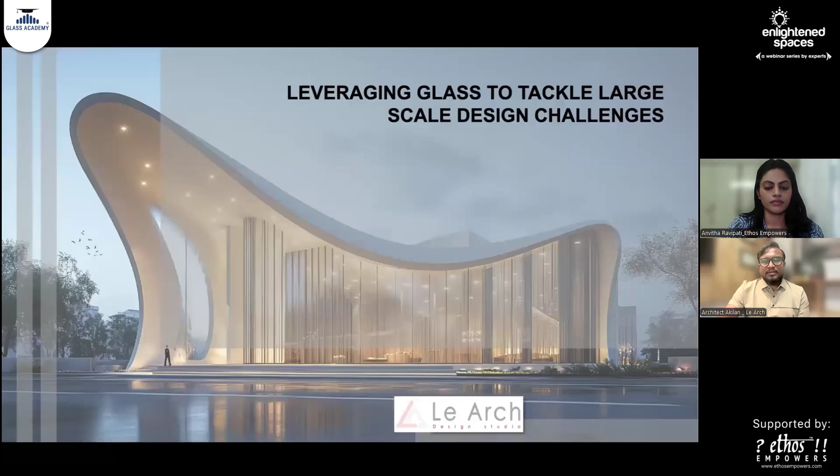I want to show some slides about glass. If you see this image, you can see how, because of this glass, we are connected with nature. Without glass, just imagine how this would look. If there were a solid wall behind this, there would be no connectivity between external space and internal space. So basically, glass's main unique ability is to dissolve boundaries between inside and outside.

Through glass we can connect with nature too. If you see this slide, you can see how architecture and nature are connected. Behind the glass is a totally contrasting world from the real world, and behind that we are living in it. So between architecture and nature, the connectivity is there.

Also, if you see this, it's a built form and human emotion. We can view different typologies of built form through our living spaces. It also frames views and creates a sense of openness. If you thoughtfully design the glass, it's not just making the building transparent, it makes it alive. It changes through the day with light and reflections, so it's constantly connected with the surroundings. That's the idea of glass.

It also invites light. So through these slides, what I'm trying to convey is that glass can be used in all surfaces - no matter if it's a wall, a floor, or a ceiling. Everywhere we can use glass to get connected with the outside world. That's why I want to mean it as a connector.

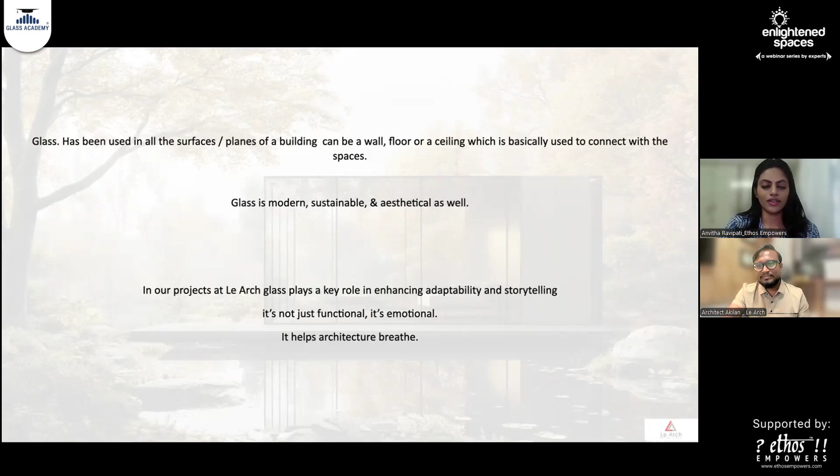Absolutely, very well put. I think now that we have these pictures in front of us, we'll be able to relate to it on a much better level. Now that we saw a glimpse of the visual understanding of the importance of glass, put beautifully through an amalgamation of pictures that you shared in your presentation.

This leads to the next question: you've worked on a wide range of projects from hotels and wedding halls to experience centers and commercial buildings. Could you walk us through a few of these projects where glass played a pivotal role in shaping the design, both in terms of aesthetic and performance? Now that you've shared your initial presentation, we're interested to see a little more about your projects. Feel free to have a dialogue and share your screen.

Definitely. So I just want to explain the typologies of glass. If you think about glass, it can be used in architecture for different mediums - for strength purpose, for safety purpose, for thermal insulation purpose. So the purpose of the glass defines the building. I want to present the typology of glasses and how it helps in doing the design in our large scale projects.

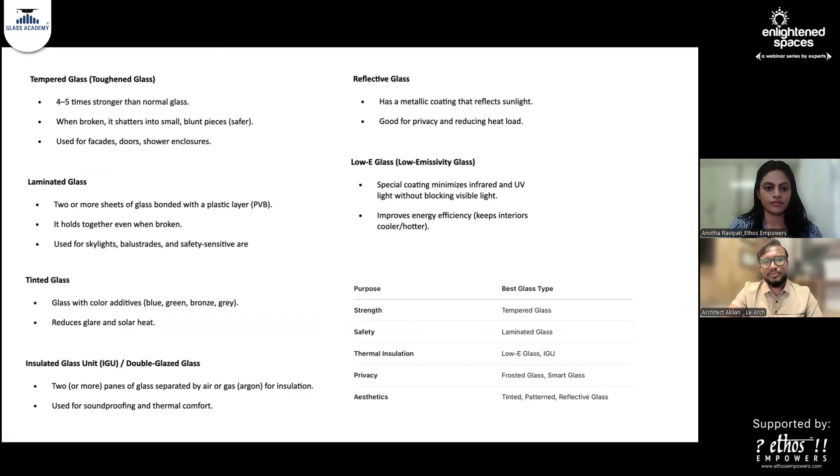I want to share my screen. As I mentioned, there's a lot of typology of glasses you can see. If you take a toughened glass, it's a stronger one, so when it breaks, it gets into smaller pieces. That is the main objective of toughened glass.

Also, you can see laminated glass. Laminated glass has two different glasses with a PVB layer in between, so if it gets broken, it's more safer. That's why this can be used in skylights or hand railing, those type of areas.

So these are all the types of glass which we used in our projects.

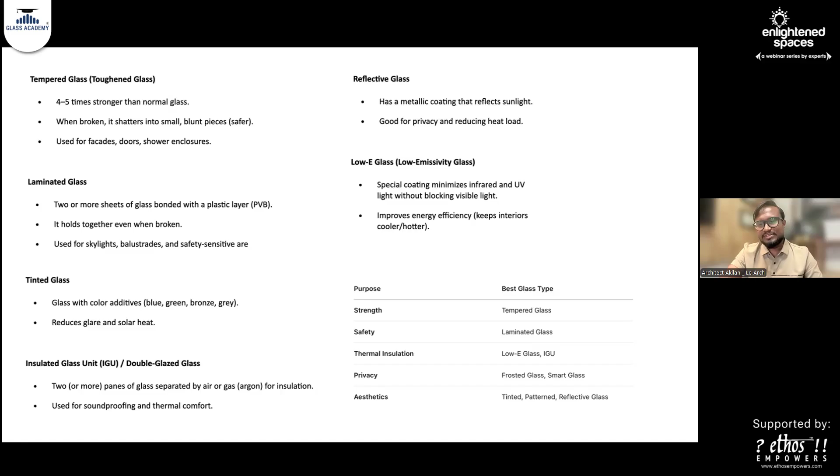So which will give a monolithic feel to the road presence. Also, the building will look totally in a monolithic way. So if you see this, you can feel that palace kind of structure.

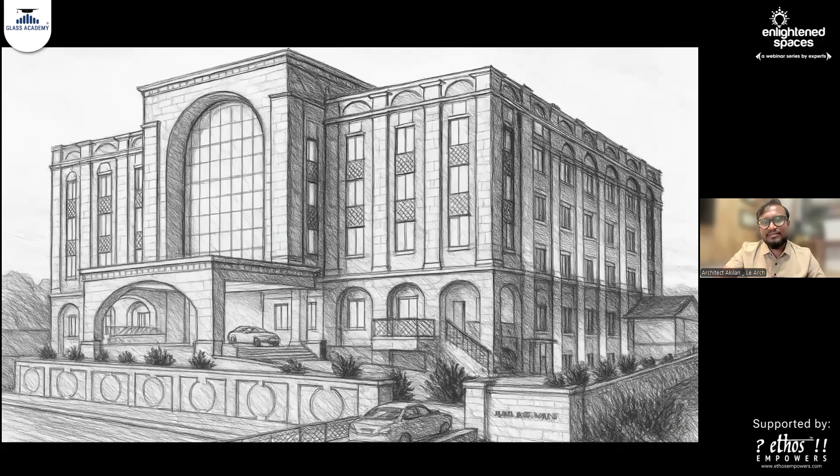The moment we blankly think about the design, we didn't have any thought about the materials, but we wanted to compose this design as glass, like a sandstone finish, with some kind of enhancing light elements to add to this design.

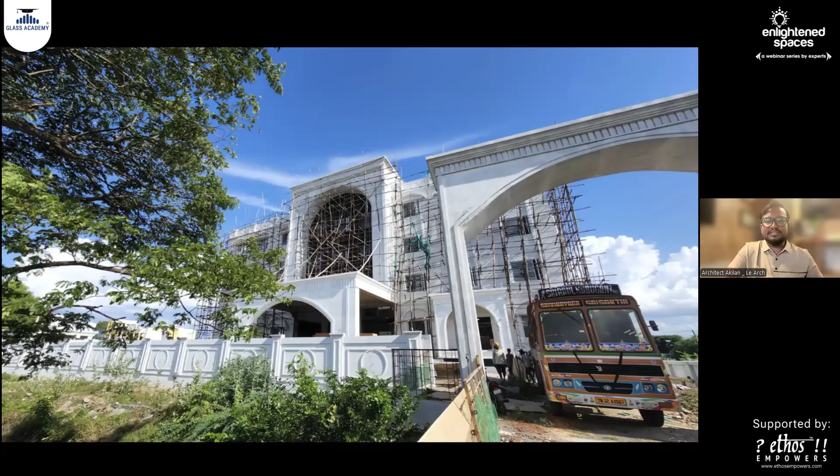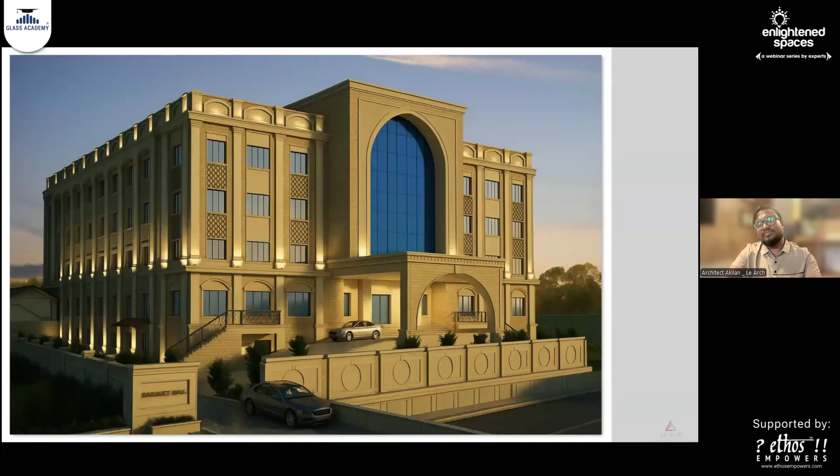So later on, we thought about Midas Gold glass. This is the site which I told actually, a complete monolithic structure painted with the primer finish. While designing, we thought about giving some sandstone look for this building, so you can see our rendering, which has the monolithic view of the complete building with sandstone color texture paint, and we have given it with the blue color glazing.

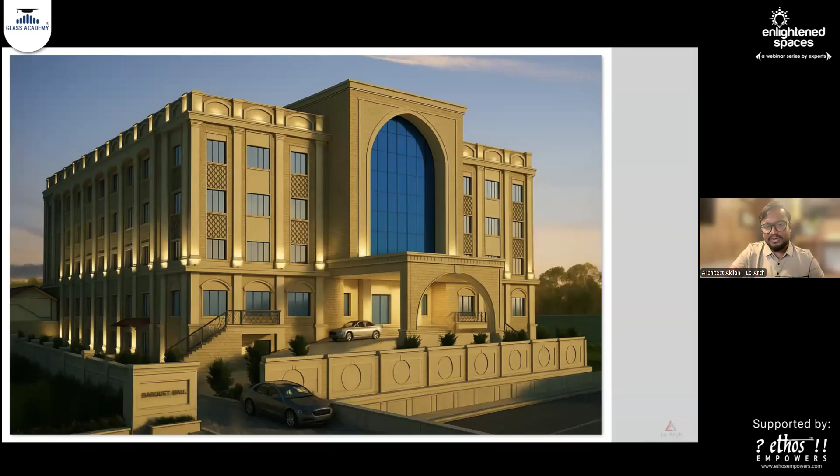So this blue glazing is totally blocking and breaking the monotony of this complete facade. So we thought about another glass through Saint-Gobain, which is called Midas Gold. You can see this — we tried that Midas Gold glazing, which totally blends with our complete design, and we also got a monolithic view of the building.

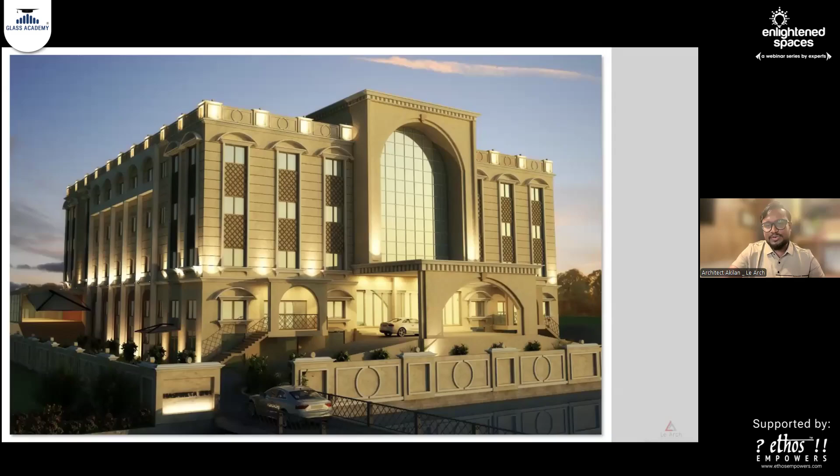So this is the next option rendering which we achieved with the Midas Gold design. It's a 6mm thick glass. You can see this under-construction image — the complete building is now painted with the sandstone texture color paint finish.

We made a mock-up with the Midas Gold glass, so you can see the mock-up also. There is a small square piece of glass that has been installed there. After this, we got approval from the client.

Then we proceed with the installation. So you can see how the Midas Gold is in the process of adding value to the facade. So the final result was totally magical here.

So we choose to use Midas glass for the facade, not just for aesthetic richness, but how it harmonizes with the overall architectural language. So now we finally got that monolithic visual through this glass, the texture paint, and this lighting. So in the daytime, you can see this massive look of the building, which complements the complete design language.

So these are all some daytime views. You can see the reflection of sky in this glass. Also, it totally blends with that monolithic structure concept.

We use this Midas Gold not only in the main facade. Wherever we get to use the smaller details around the building, we use the same glass to get the design language. This Midas Gold is more special, which has that subtle metallic sheen to the glass. Also, it warmly glows during the evening, and it has a refined gold finish hue during the daytime. It gives a visual dynamism to the complete design.

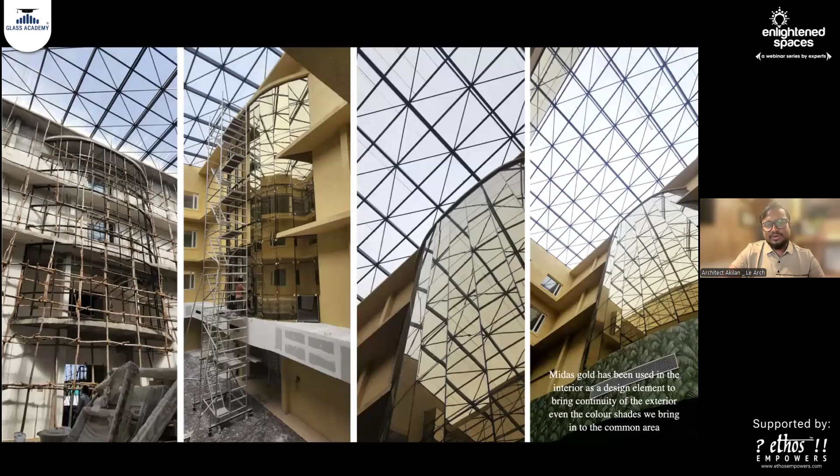Later on, we thought about Midas Gold being used in interiors because we wanted to have continuity of external space. So we brought the Midas Gold glazing into the interior part, where we have the same coloring in the atrium space and the common areas of the internal part of the building. This is how it blends with the design.

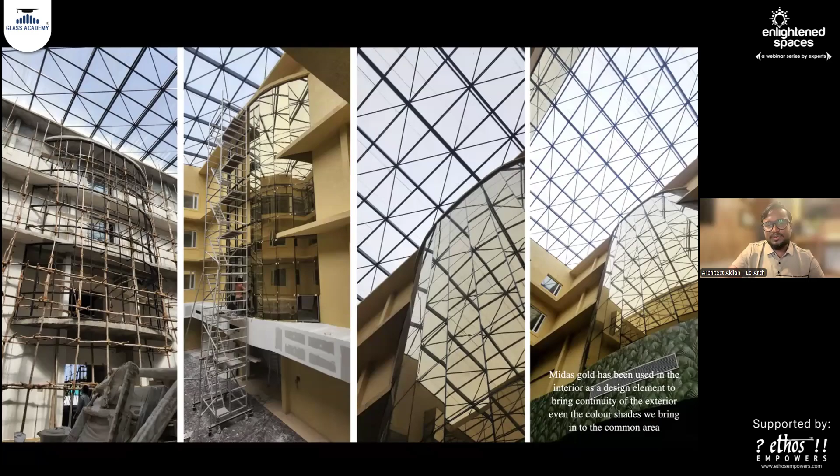Also, this is another laminated glass which we used in the atrium space, where we have a skylight into the building. We thought a laminated glass could be used here. This is 12 plus 12 plus PVB, which is the specification we used in this atrium space.

So here on your left, we can see the construction phase of the atrium level. We wanted to create that cross pattern to support the glasses there. These are all the images taken during the construction phase.

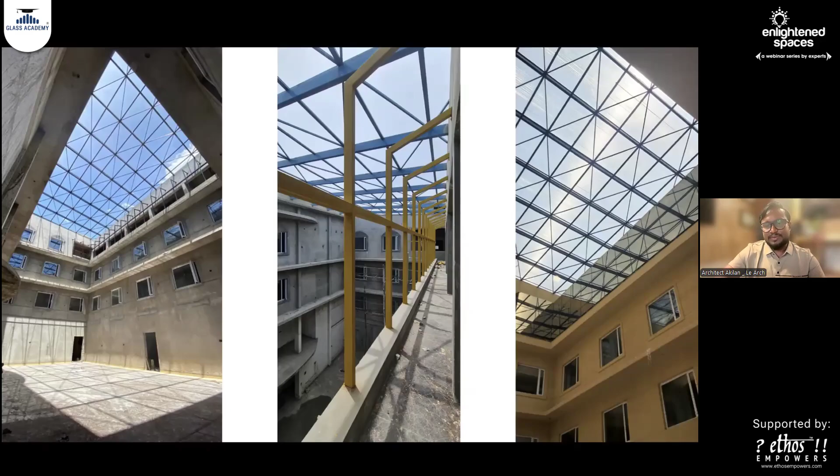Also, I can showcase the recent photographs of the completed image. This Midas Gold did magical things to this building actually. We were very much happy, and the client also was very much impressed with the final output.

I want to explain about my next project, which is New Rajasthani Marbles. We had a totally different challenge in this building because this building is completely a steel structure building. There is no concrete, there is no civil structure into this concept.

The main objective of this project is that the site sits along the prominent road. So we want to create a strong visual presence for this building. Also, we want people to get engaged with the facade, so we want to think about a distinctive tone and immediately capture the attention of the public. Also, we want to create some brand identity for the building.

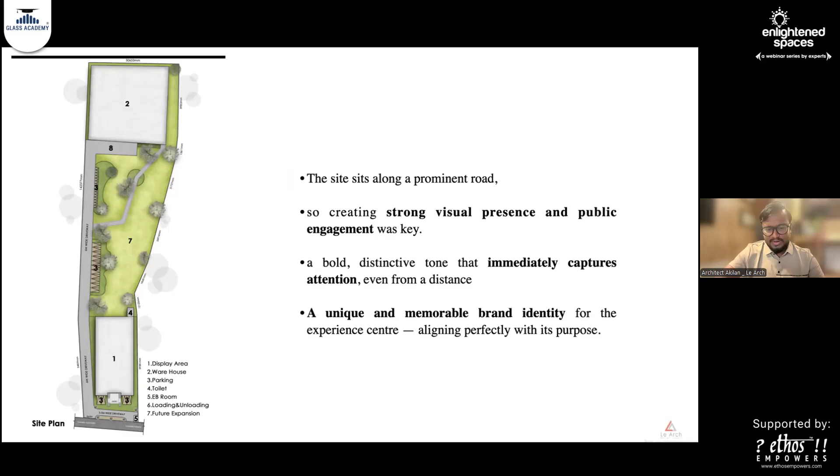Also, we have a lot of design challenges in this project, which is a time bounded project. We don't have much time to take decisions because we want to complete the project in 12 to 15 months. We had a lot of challenges like how to go with the project, what type of material we can use, and how quickly we can complete this project. Also, we think about the sustainability factor and reusability factor.

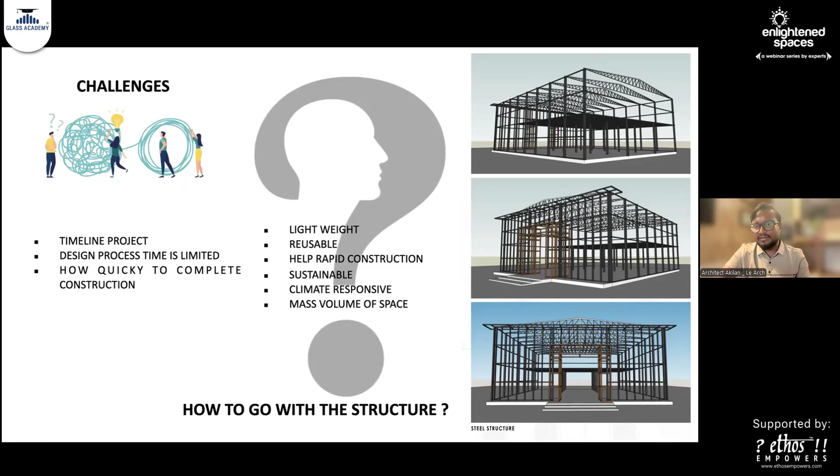So you can see how the framing has been done for this project. We focused more on the facade, so you can see the facade layering of this project. In the central portion of that slide, you can see where the display area is coming and where the entry has been given. Generally, we thought about giving the glass at the central part.

Then we wanted to give more openness and gain more lighting, so we thought about going with complete glass from end to end of the facade. On your right, you can see how the framing has been done.

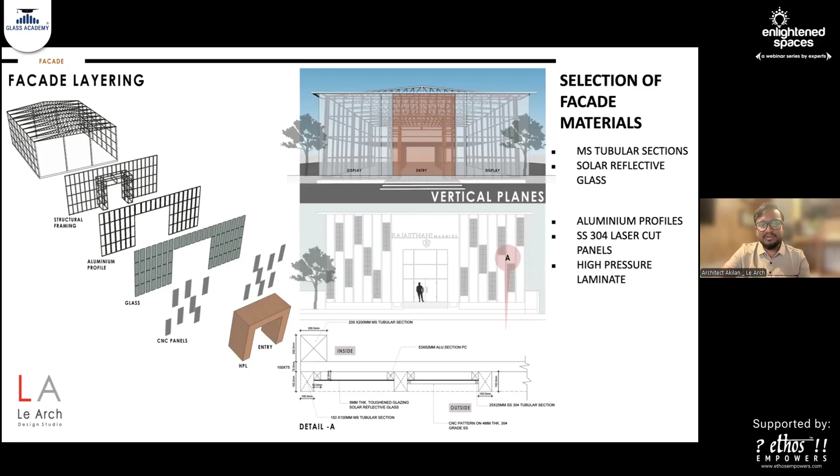After the metal CSP structure, we did the structural framing, then the aluminum framing has been done. Then we thought about going with the complete facade in glass. So this is the render which we did for the proposal.

We mainly thought about the forest green glass from Saint-Gobain. We chose this forest green to get the visual identity. Also, it's a south facing site where we have a lot of greenery foliage at the front of the building, so to complement that green color, we thought about forest green. Also, this glass protects much more from harmful UV rays.

Also, it protects interior fading because it's a tile showroom, also sanitary showroom. Most of the products will be displayed interior, so it doesn't get faded quickly. So this glass has that property to avoid fading. Also, we gain optimum daylight.

So we thought about a glazing which helps us complete the project, because during the construction itself we make the panel sizes and make to order. So once the framing has been done, the glass was ready, making it easy to install at the time of execution.

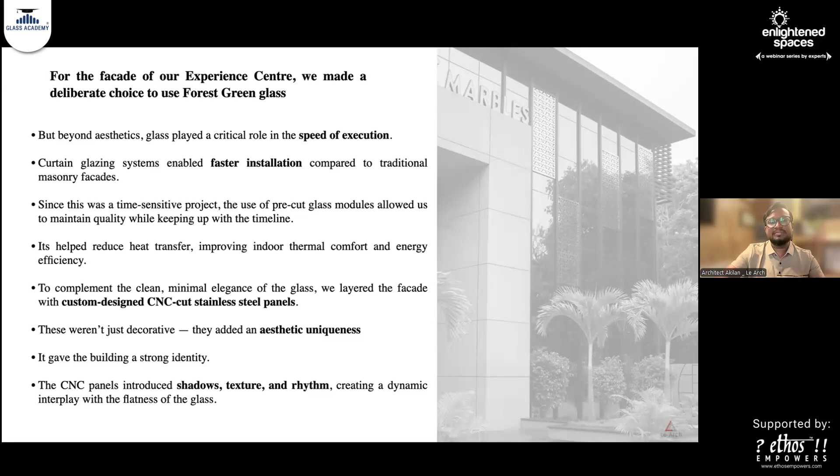Also, we wanted to complement that glazing facade with some stainless steel CNC cut panels, which give some aesthetic uniqueness to the building. So you can see those CNC panels complemented with the glazing.

Even the doorway and the entry area - everywhere we have cladded with the forest green glazing. As I mentioned, it sits on the main road, and now we've achieved grabbing the attention of the public.

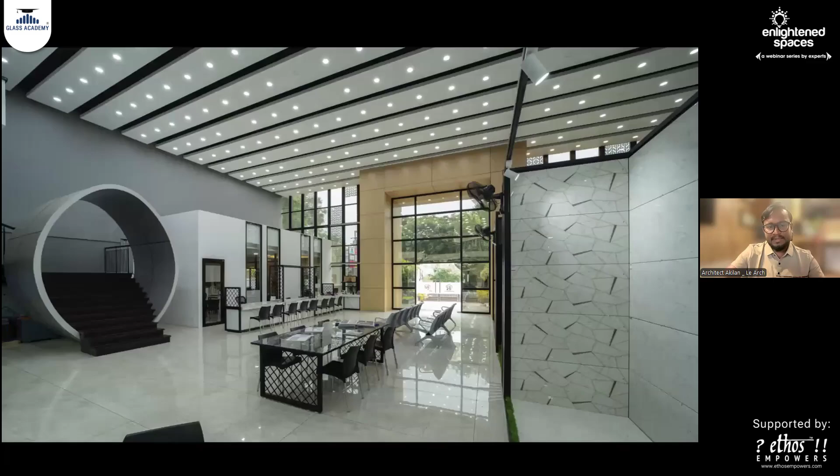So this is some of the view from inside, where we are harvesting the daylight through this glazing.

You can see the green foliage at the front of the building, because the client had a query since we are giving a complete facade with the glazing - what about the sun radiation, which will affect the air temperature and air conditioning efficiency, among other things.

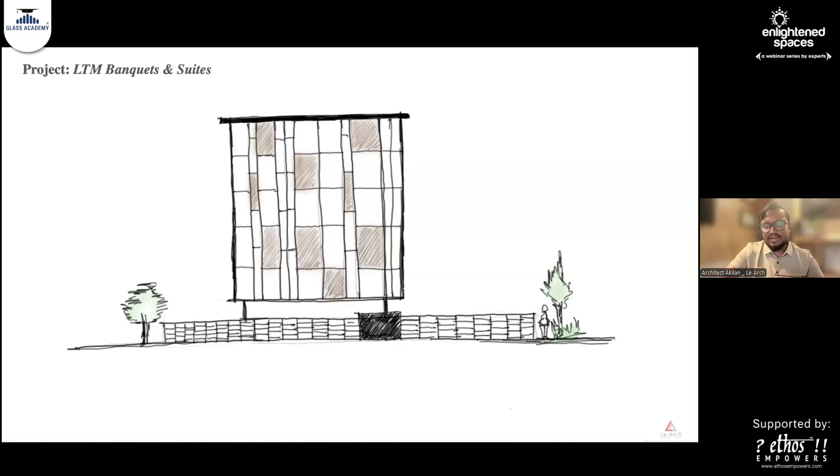Now I want to talk about my third project, which is LTM Banquets and Suites. This is another interesting project which we worked on with complete glazing.

As I mentioned in my initial slides, this project's complete design initiated from the site context. The moment we visited this site, the main thing we saw was the bigger temple adjacent to the project, also a big temple tank in front of the building site.

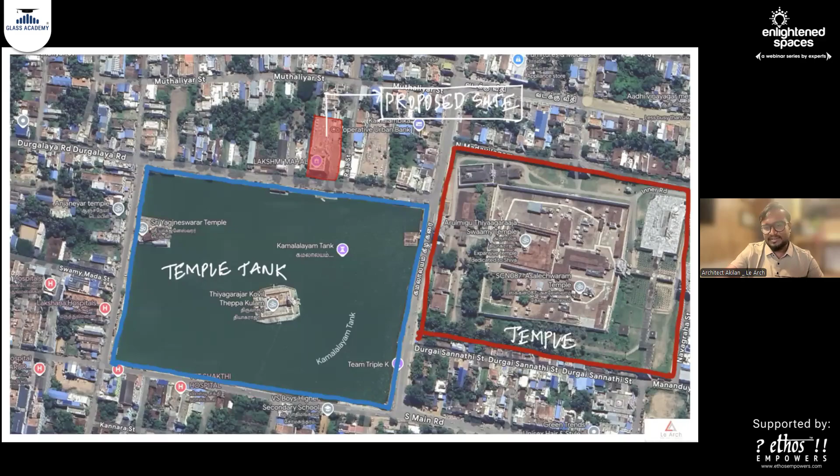So our initial thought process was how to harvest this view, because we have a beautiful temple nearby and a beautiful temple tank which has water 365 days a year. So our main design concept was how to harvest the complete view.

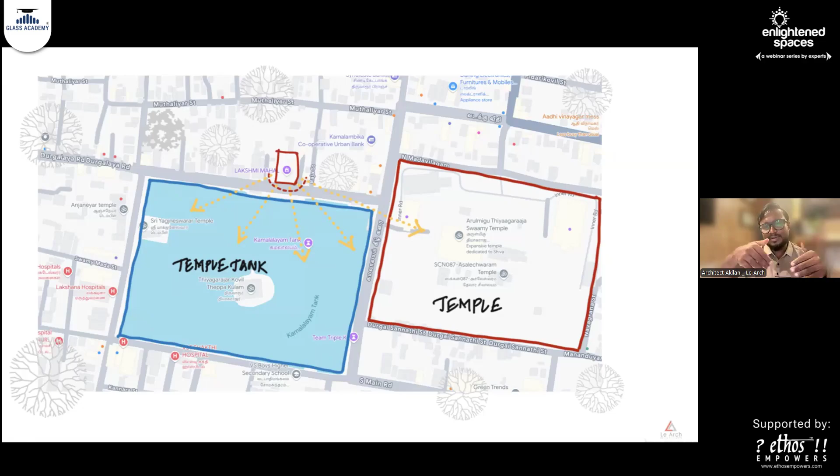So we thought about having a panoramic glass for the building. You can see from the building, if you have a look, this is the view we see near the temple tank. On the eastern side, we have a temple view.

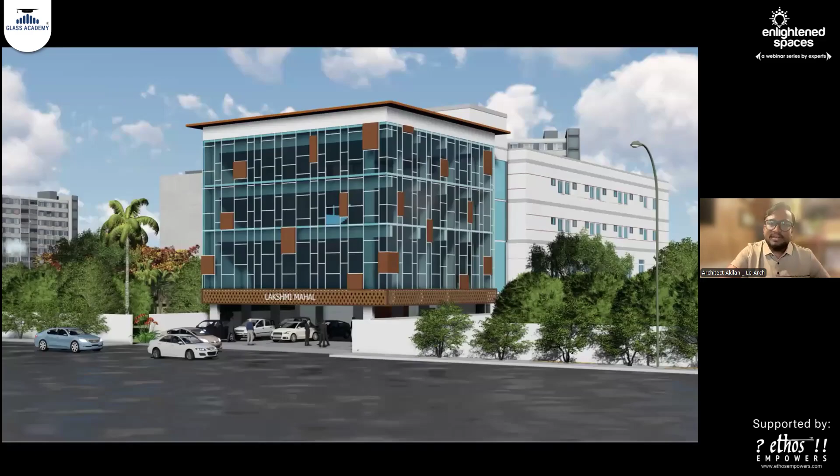So this is our proposal which we gave for this building. You can see the complete glazing all around, wrapped almost like 360 degrees - well, not quite 360, maybe 180 degrees we covered with glass to achieve that complete view.

And especially we chose Saint-Gobain ET725, which is a high performance thermal insulation glass that also helps reduce heat transfer.

Because when we thought about glazing three sides, the main question from the client was how to retain the AC temperature. Since opening more area to the glass means there will definitely be sun radiation hitting the building, the internal temperature would get lost even if we put in air conditioning.

So to maintain that, we thought about going for insulated glass. We approached Saint-Gobain, and they recommended this ET725. There are even more advanced glasses available, but for this particular building, since it's a tier 2 city, we also thought about affordability, because the client had to afford to spend for the glass.

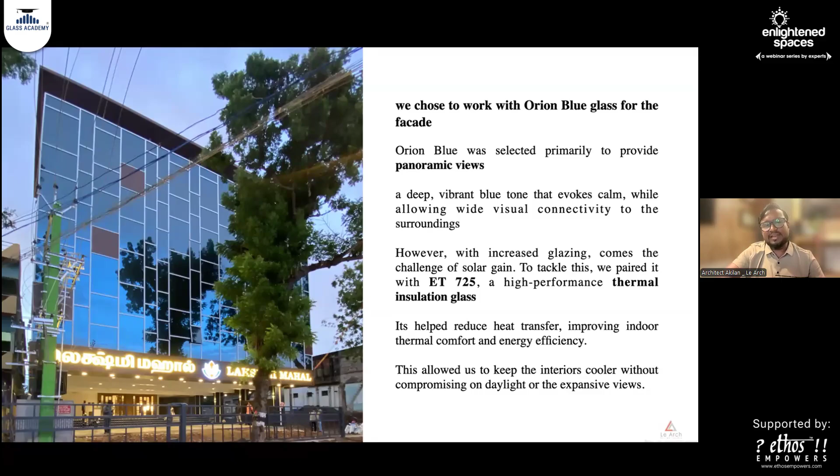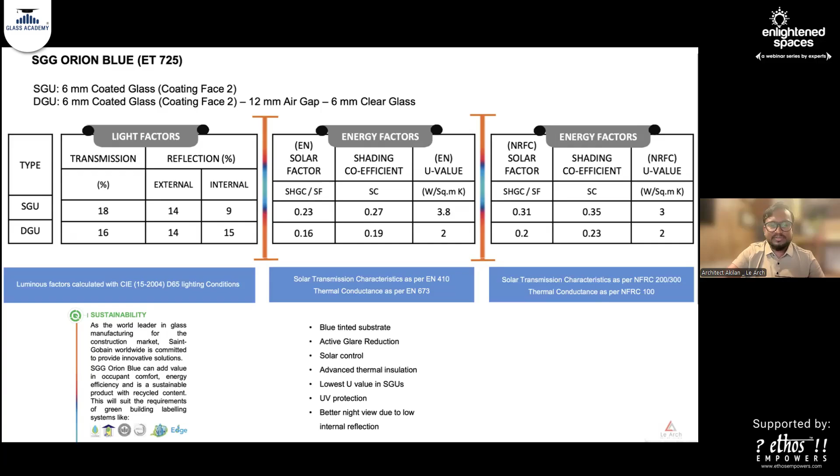The most interesting part of this design is we create a geometrical pattern in the facade. You can see aluminum fins inside the facade which create that geometrical pattern, just to reduce the size of the glass. Because the size has been reduced, it has more safety, since smaller panels are less vulnerable and have lesser impact on the building. Also, it will be lower cost compared to larger panels.

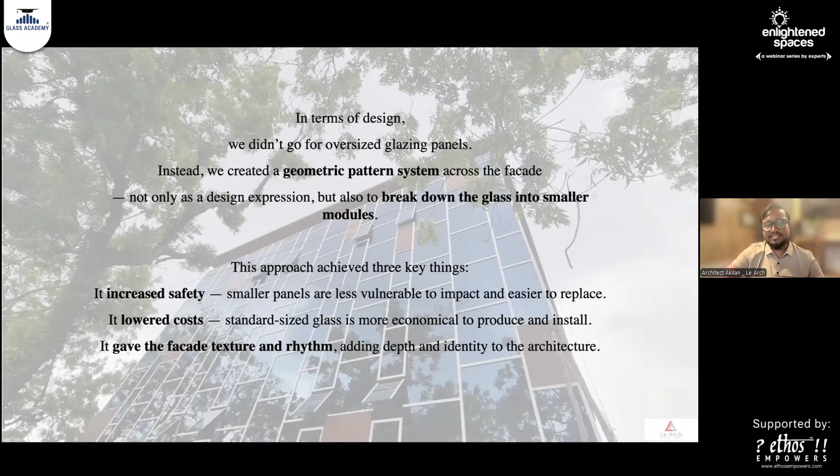It also creates some rhythm and texture to the facade, giving a beautiful architectural identity to that particular spot. You can see that pattern - we made it as 6x4 panels and 6x2 panels, so in case of any breakages, the glass can be replaced easily.

We have also given some wooden touch to the facade, since the site is surrounded with trees, and in front of the building also we have more trees. To represent that wooden color, we introduced some wooden random boxes to the facade. The main parameter here is that we save space through using this glazing.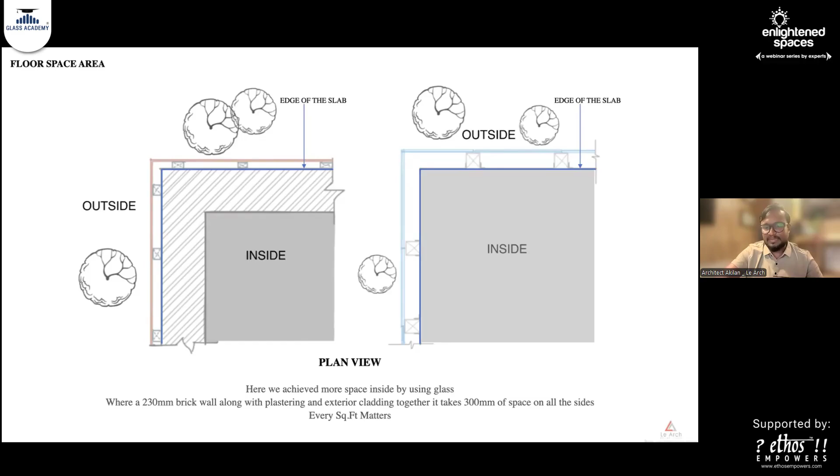So the overall carpet area gets reduced compared to the glazing area. With glazing, the complete floor area can be utilized. This is another advantage of glass - we can save more space, because in commercial buildings every square foot matters.

This is our fourth project, Quality Arcade. This project is located in Puducherry on the main busy street of the city, where you can see the main road junction. These two roads connect on the upper side towards Chennai - one towards GST road, one towards ECR road. So this site is located on the busiest road of Pondicherry.

We thought about giving this project some aesthetical identity, because it's a tile showroom building. We didn't want to display all the products on the facade. Instead, we thought about going with aesthetical value for the building - that's how the concept started.

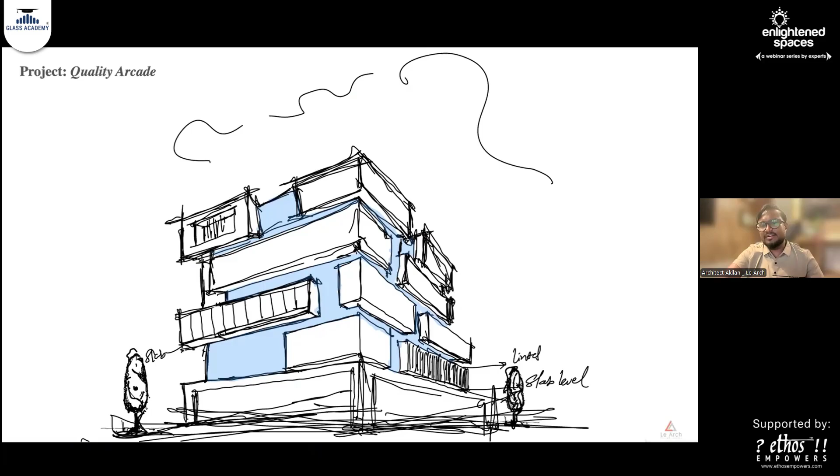You can see the sketch, which has random protruded projections at different levels, which we thought about cladding with tile. Then we had an idea to go with louvers - these are all different options we tried out. Finally we settled on the glass option, and this is the final rendering we did for the building.

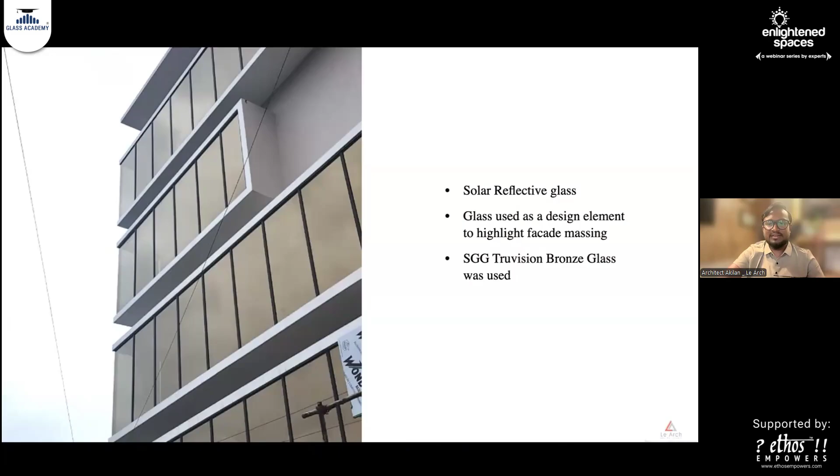Here the main glass we used is this Saint-Gobain Truvision bronze glass, which is also a solar reflective glass. These are all design purposes which add value to our project. This bronze glass has glare reduction capacity and also has a nice sophisticated look.

We didn't introduce any horizontal mullions to the project, because we wanted to create an uninterrupted reflection on this building. Also, to compose and give aesthetical value to this project, we introduced protruding volumes, giving depth and dynamism to the facade, so it has a split facade. Almost 60 to 70% of the building has glazing, and the balance area is done with paint finish.

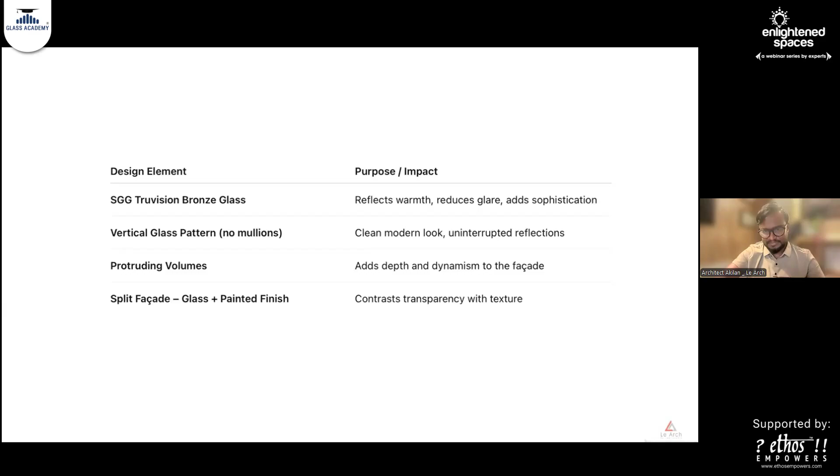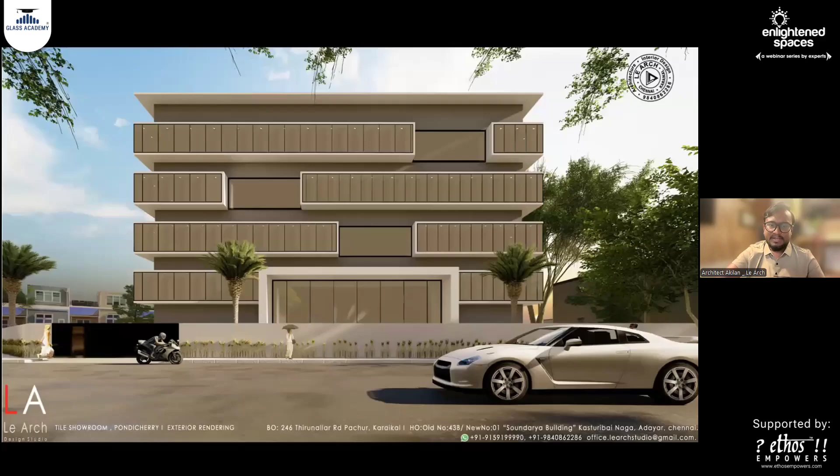This is the construction image, which was recently completed, but we still need to take a professional photograph for the project. This is another angle of view.

Since it's one of the busiest roads in the city, we wanted to create a movement of light on the building. The protruded element, which is clad with bronze glass, creates a movement of light in the glazing whenever there's sun movement. It also has a reflection, so whenever people are traveling on that road, they get attracted to this movement of light and the reflection. The facade always feels alive, catching the eye of passersby. The bronze tint beautifully reflects the light in warm tones.

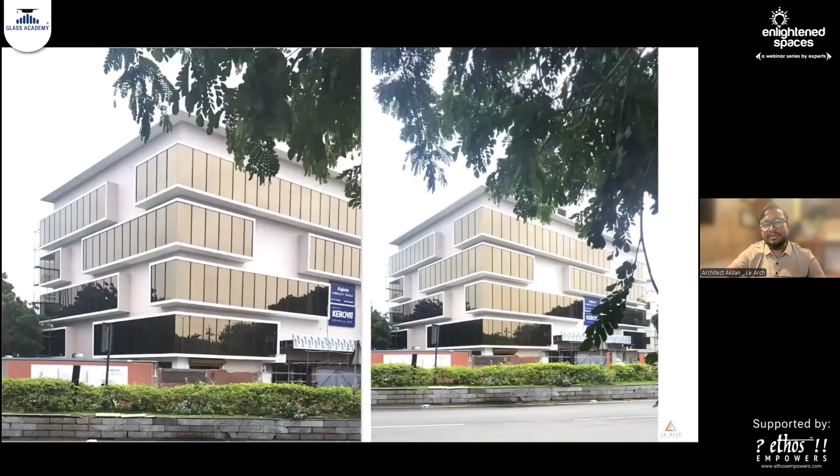We got random volumetric protrusions which complement the complete design. This is the completed view of the building, where you can see the random protrusions throughout, creating that movement of light. This has an impact with different types of reflection at daytime, evening, and morning, so it has a play of light. You can also see the reflections - some portions have tree reflections, some portions have sky reflections.

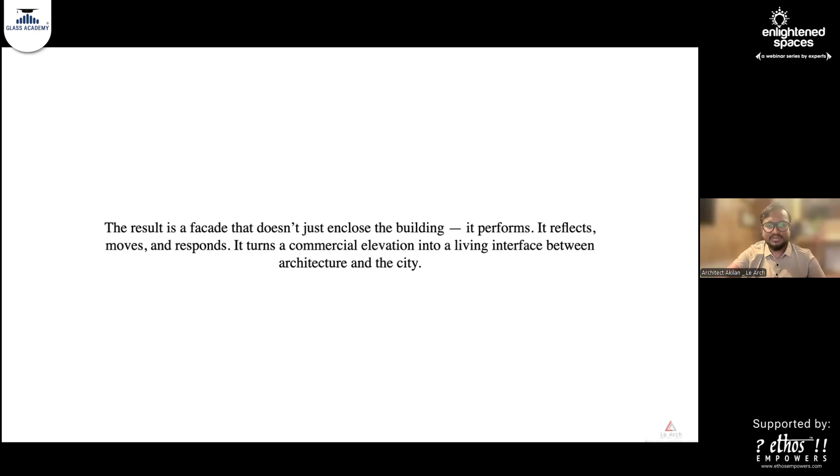The client requirement is that he wants complete glazing throughout the building - not much brick wall, not much solid surface. They want to create a corporate look and also minimize the civil works. So the main objective and requirement from the client is to go with glass.

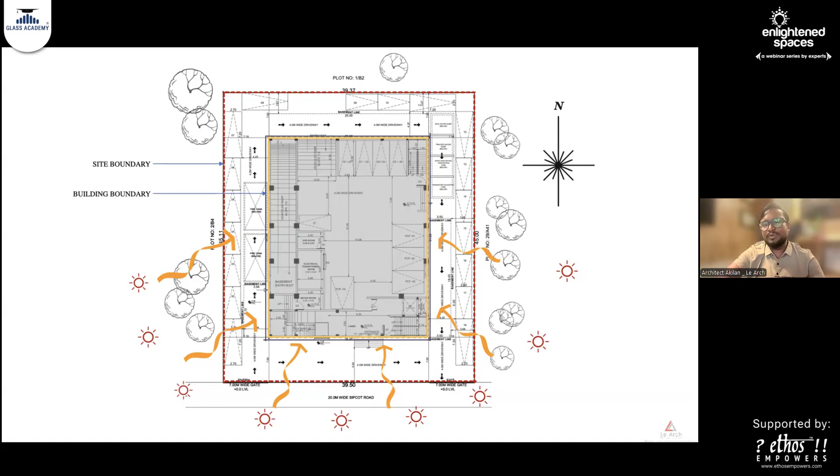Then we had a challenge because of sunlight - there will be too much radiation into the building. So how to cut that off? We had a brainstorming session with our team and finally came up with a solution: why not make the external wall with a zigzag pattern? You can see the glass and the movement of sunlight from east to west - the building is facing the south road. That's how we managed to cut off the radiation through this sunlight.

From the morning sun till it reaches the southern part of the site, almost 50% of the surface will get heat radiation. The other 50% won't get much light because of this in-and-out pattern. From afternoon to evening, the other half gets radiated, so the eastern part will have lesser radiation. Through this pattern, by designing and fixing the glass pattern this way, we achieved around 30 to 40% reduction of radiation.

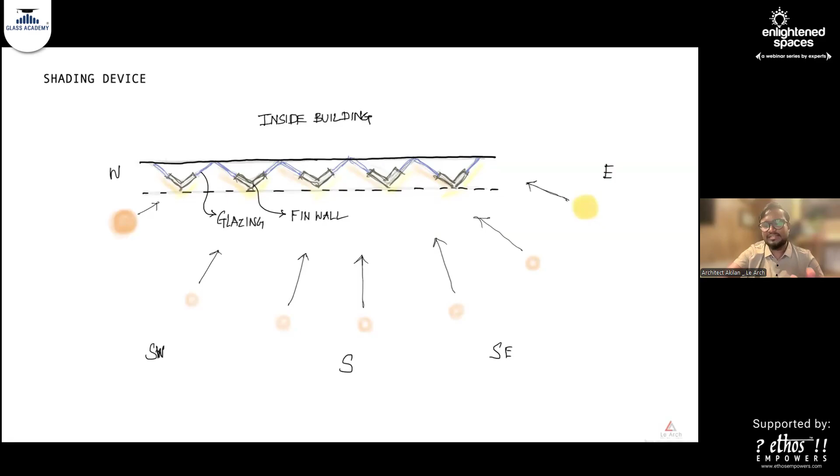The other main factor we gain is by reducing civil works, we are also reducing the cost in a way because we are using glazing. The unit weight of brickwork or solid wall compared to glazing is higher, so definitely the complete dead load of the building would increase, and the cost would also increase.

Now we can do the framework, and after that we just fix complete glazing to the building. That will enormously reduce the dead load of the building, so we avoid adding more weight through civil works. In this project, we are thinking of going with SGG, the Saint-Gobain Antelio Plus series, but we haven't yet defined the exact model of glass we are going to use.

Since we are approaching to get IGBC platinum rating for this particular project, we are thinking about the premium series of glass. As a conclusion, it is reducing the dead load, which is saving cost to the civil budget. Also the carpet area, which we can save. Also it will invite more light. It's a sustainable material which helps to suit the requirements of green building, so we can get labeling like LEED or IGBC. This glazing will be much helpful for the sustainability rating factors also. Thank you.

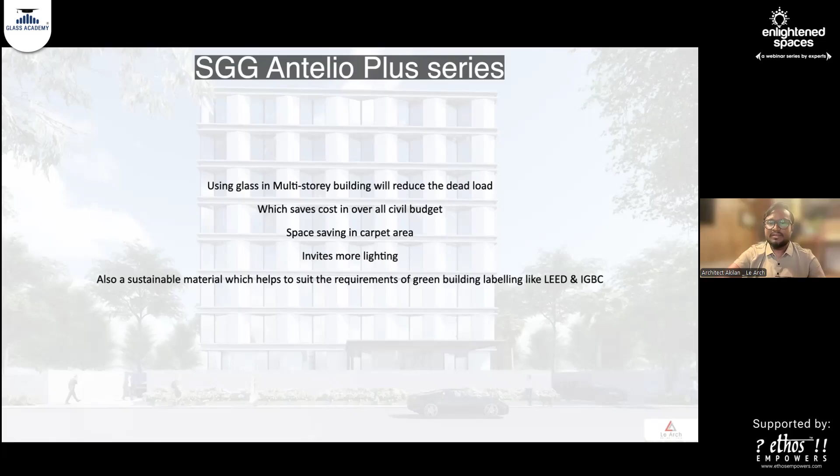Thank you very much, sir, for showcasing us the wide range of projects you have. Though you have brushed upon what different types of glass can make a difference in striking a solution for a large-scale project, we're all intrigued from the audience point of view, and we would like to pick a few questions, pointing out one of your projects to understand what type of glass in depth can be spoken about. Today's conversation also runs about glass and the selection and the ideology and the solution it brings to your buildings and designs. Continuing to the conversation we had earlier, the hotel Le Royale showcases the use of Midas glass, like you showcased to us, to match the interior theme and the hardware also. For new architects and designers, selecting the right type of glass can be a very daunting task because every single day there's an evolution coming up and thousands of products are being seen. So what factors do you consider while choosing glass for a project, especially in terms of aesthetic, functionality, and sustainability?

As I mentioned, we had an idea to go with some type of glass, but while designing, we never thought about any type of finishes or material because we used to do more options for the designing. Initially we thought about a contemporary design. After thinking about the design context and the site context, we wanted to create a contrasting element to the particular site. Then we thought about the monolithic structure, painted with a single color, because sandstone is a cost-involving factor. So we thought about creating a texture paint with sandstone finish. After putting together all the design, we went with normal blue glazing.